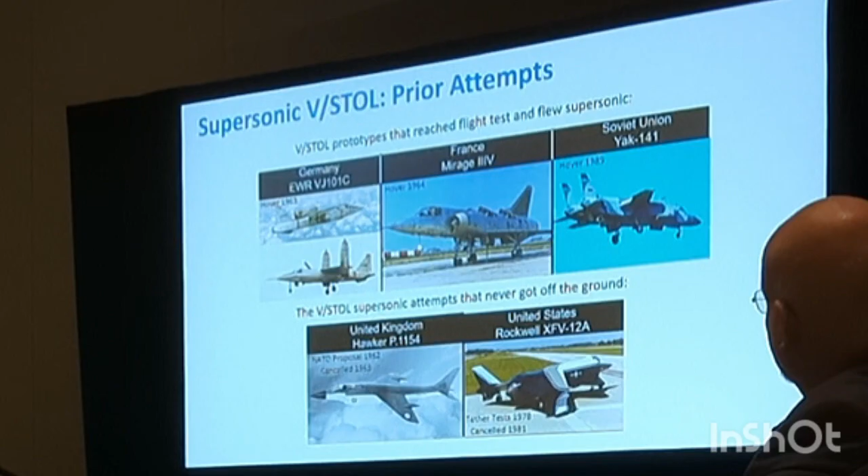Until the F-35, even the Harrier, I guess, that was not possible. Now, the Russians made a great attempt with the Yak-141, but it was not enough. They only built about 2 aircraft, and it was basically canceled with the dissolution of the Soviet Union. But still, it was probably the best attempt by any country to do supersonic flight and at the same time vertical takeoff and vertical landing. So we need to give the Russians a little bit of credit for that.

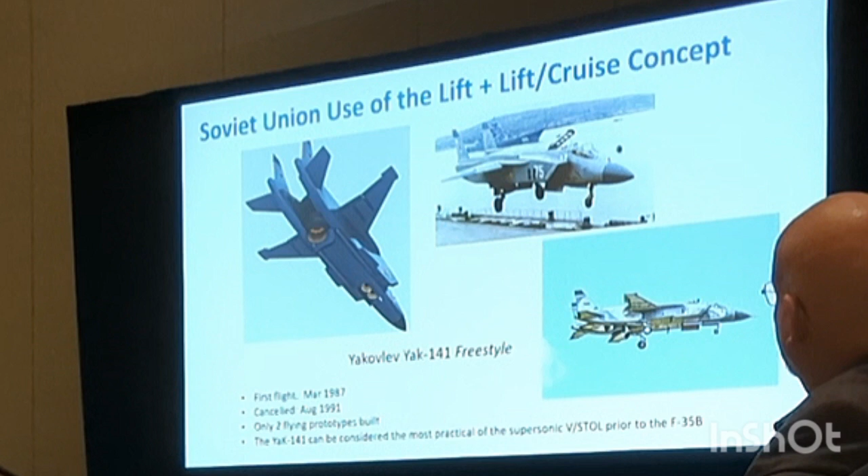Now, when Lockheed Martin—when the government came to Lockheed, they said, well, not only do I want supersonic flight and vertical flight, I want the aircraft to be common among the three services: the Air Force, the Navy, and the Marine Corps. Anyway, so here we are. So they were challenged even more to be able to do that, and that made the work of the Joint Strike Fighter even harder.

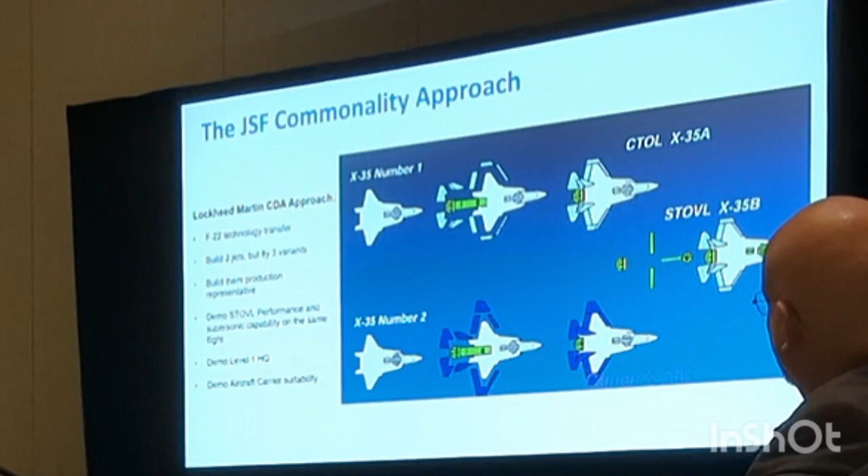I can talk for hours about the background behind all this, but in order for me to talk about the propulsion aspects of the aircraft, I need to keep going here.

Now, when it comes to turbine engines, you can either have thrust for cruise—in this case the F-22 was Super Cruise—or you can have a turboshaft in order to transmit that shaft horsepower to the front so that you can rotate the rotors. You cannot have both together; it's very hard to combine them both. In fact, until the F-35B, you never needed to combine them both.

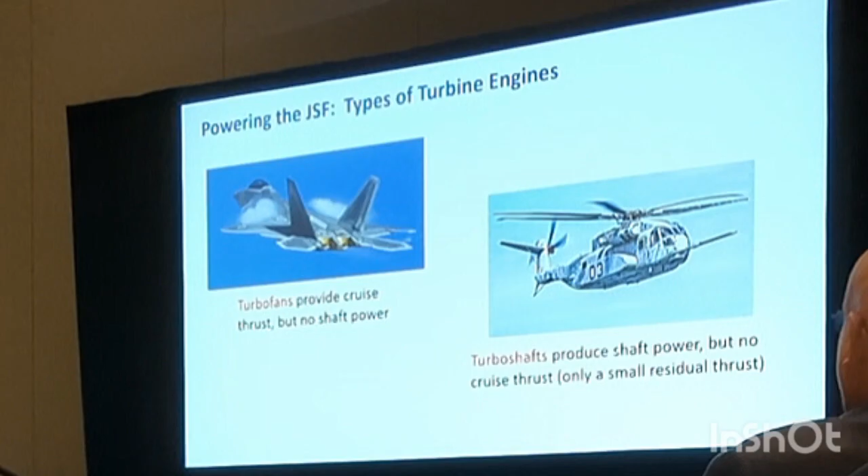There's a picture that shows the same thing I just said. In a turbojet, you get two stages of the turbine in the back, and then you get a lot of thrust out the back. In a turboshaft, you add another turbine stage, and then you move that power to the front so that you can turn the rotor of a helicopter—that's what a turboshaft is all about. So you can have either that or the other, but not both, okay?

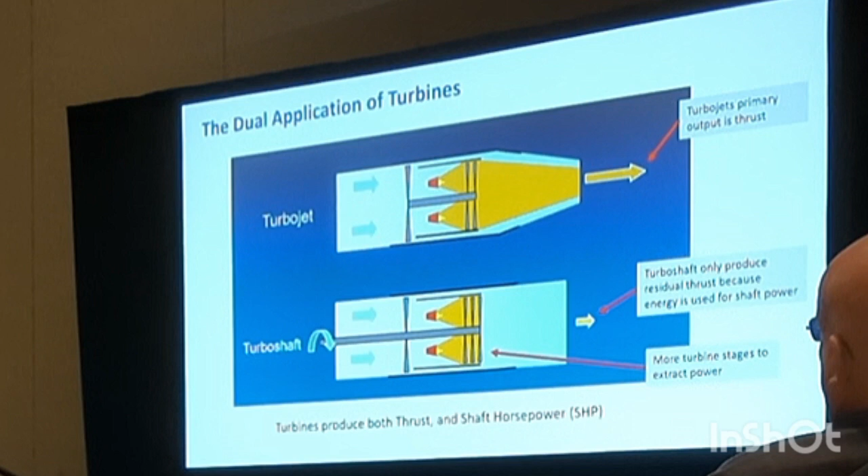Let me skip that real quick. Now, if you look at a turbojet engine and look at the energy content of the flow as it goes through the engine, the compressor will raise the pressure. Then you add fuel, and that fuel's energy burning in the combustor going out the back will basically drop as it goes through the turbine. Then it will exhaust through the nozzle, and everything else is wasted as heat, okay?

But that energy content, as it goes through the flow, you as an engineer might think, I wish I could extract some of that wasted energy. When I say wasted, it's not totally wasted, but extract some of it so that I can send it forward, so that I can put a lift fan in the front and be able to have a turboshaft and a turbojet engine at the same time.

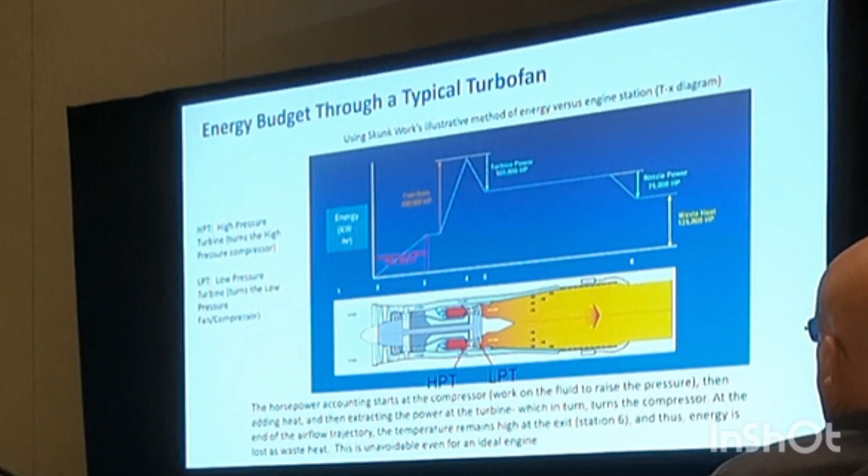That was the elegant solution that the JSF team came up with to combine both a turboshaft and a turbojet engine. Here's another picture of the same thing. I don't want to go into the math, but the bottom line is you've got energy flowing through the engine, with pressure increasing, leveling off, and decreasing as it reaches the turbine.

If you open the nozzle up a little bit, this is the elegant solution the JSF team came up with. When you open the nozzle in the back, the pressure across the turbine has to increase some. Because of that increase in pressure through the turbine, you can take some of that energy and send it forward. Of course, you lose a little thrust from the back, but you get energy extracted from the turbine that you can send to the front for the lift fan.

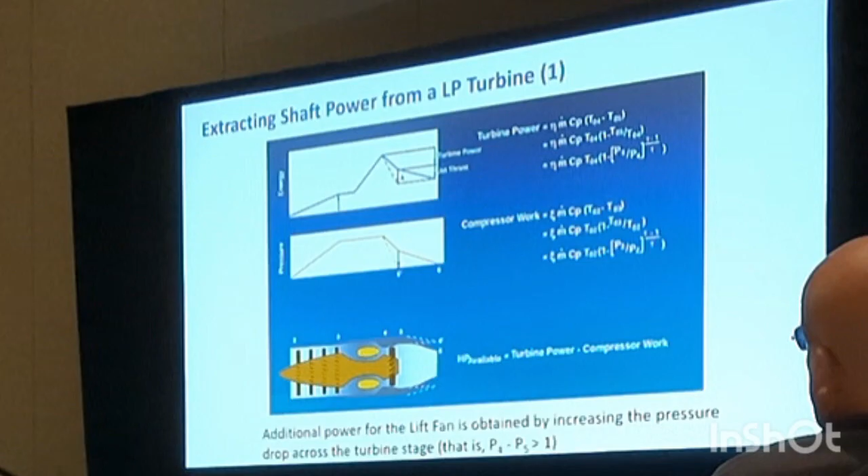Let me show you another slide. By the way, that's a picture of what I just mentioned. The thrust goes down a little bit - you see that arrow becoming a little bit smaller. The thrust becomes a little bit smaller when you open up the back.

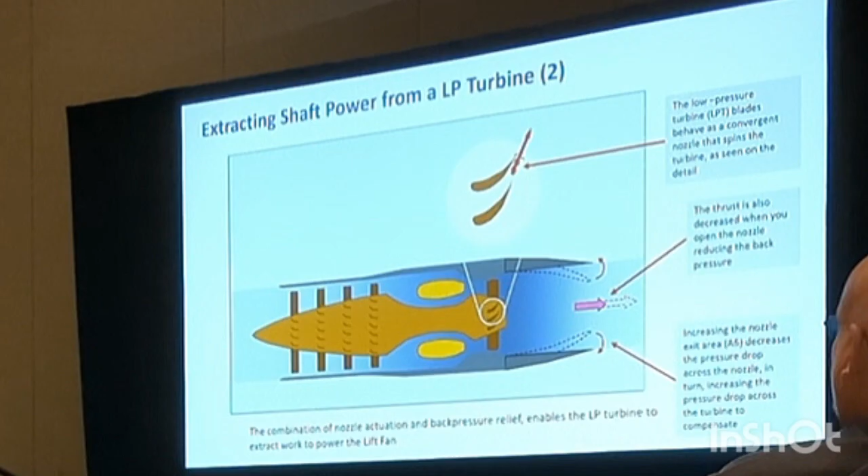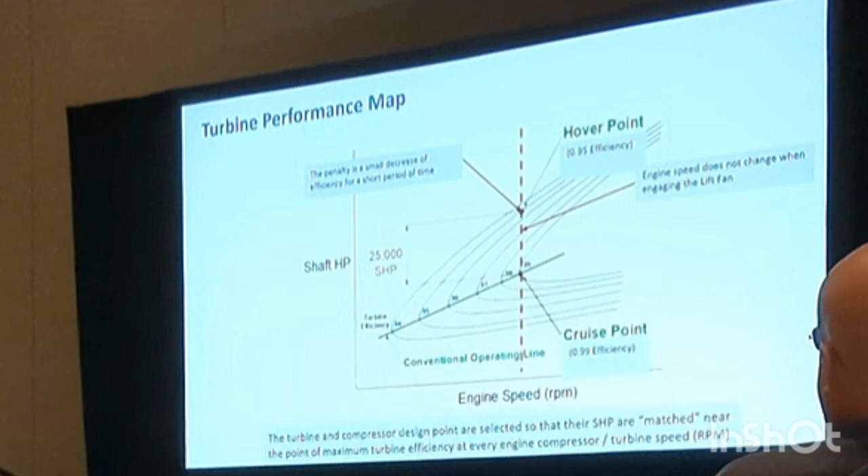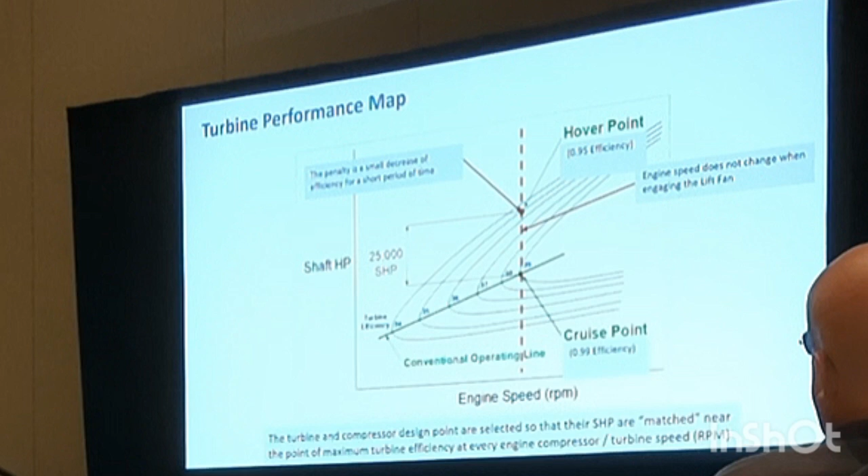That is the genius and elegance of the solution of the Joint Strike Fighter, the F-35. I know you probably have some questions about all this that I covered very quickly, but we can talk about that at the end.

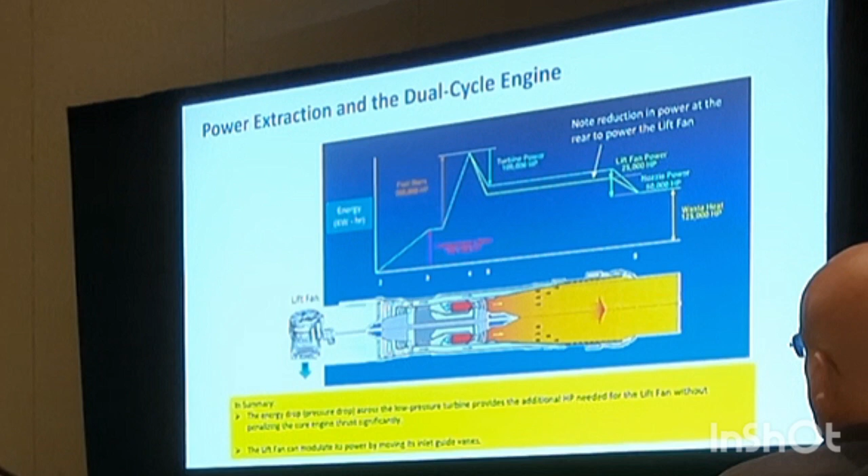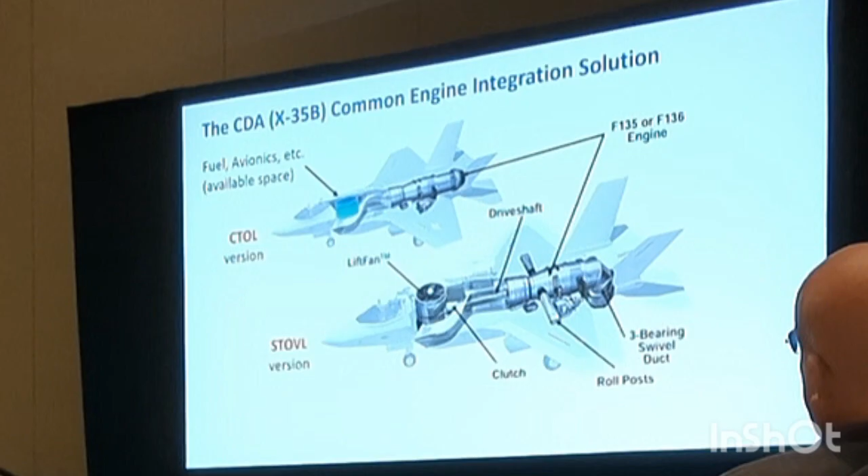Here's the common solution that Lockheed was told the military wanted - an engine that can be used for a normal, conventional aircraft, but also the same aircraft as a VTOL aircraft. Here's the same airframe with the lift fan for VTOL, and here's the conventional aircraft where when you take the lift fan out of the way, you can put fuel in there instead, or avionics or whatever. This allows the same aircraft to perform two completely different missions - that's why it's called a multi-role aircraft.

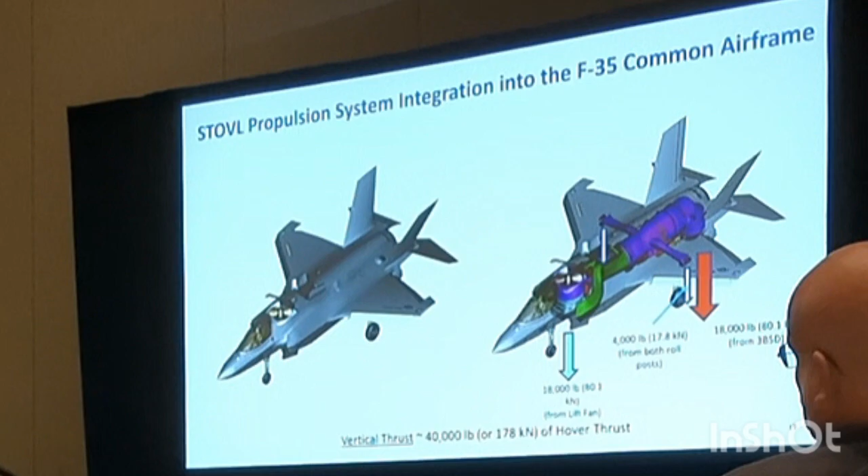Here's the same thing, and you can see the thrust coming out of the back and the thrust coming out of the front, with a little bit of thrust on the side to keep the aircraft balanced. That's the solution Lockheed Martin came up with, and that's why they won over Boeing on that contract. It was a very elegant and quick solution.

When you see that in red in the label, those are the common aspects of the engine between the two aircraft, the conventional and the vertical flight aircraft. The vertical flight aircraft has a bit more complexity because you have roll posts, the lift fan, the drive shaft, and a three-bearing swivel duct that tilts down to get the back thrust you need to go up. The conventional aircraft doesn't have that, but at least you can share the core of the engine.

You can share all that, and you can share the inlets also. That's also very important. You save money by combining stuff from different aircraft.

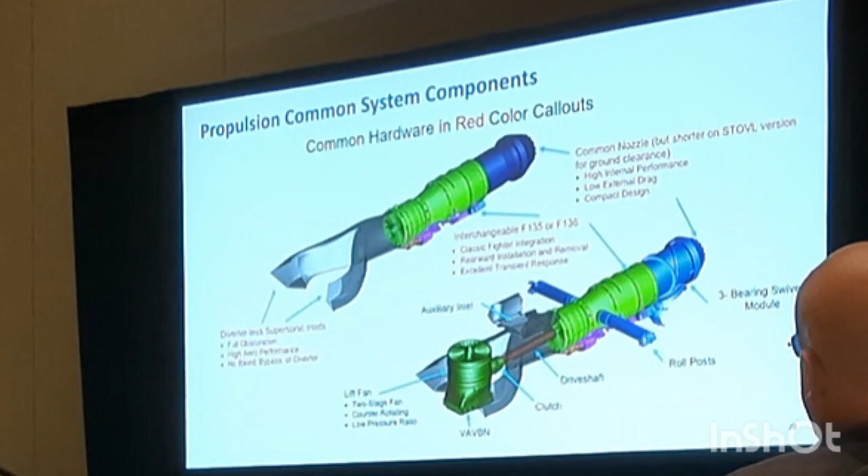And the inlets, I'm not going to go into that, that's another lecture in itself. But it's another elegant solution that Lockheed Martin came up with. My friend Tom Sylvester came up with that solution of using boundary layer plates, like an F-4 Phantom. It went from something very draggy to something very conformal. Let's call that a diverter-less inlet, and that was a very elegant solution.

In fact, the Chinese copied that. If you look at their latest aircraft, you'll see they have the same inlet. They stole it, basically, from Lockheed Martin. And I don't mind saying that because it's obvious that they did. It's perfect, a beautiful solution.

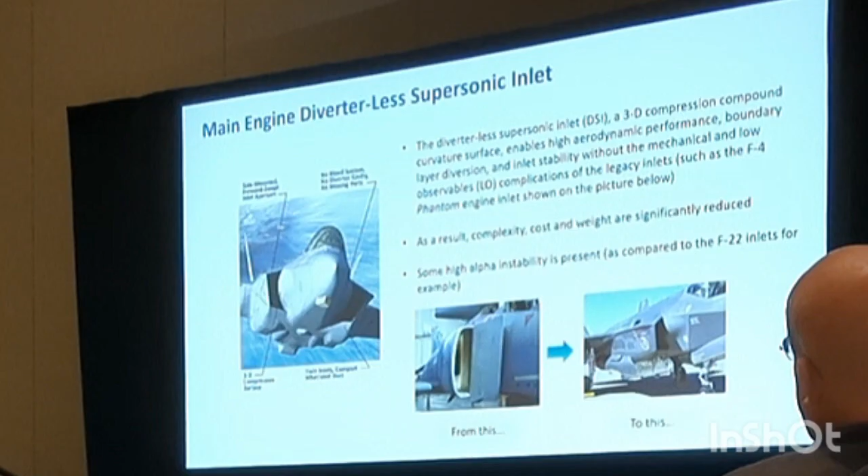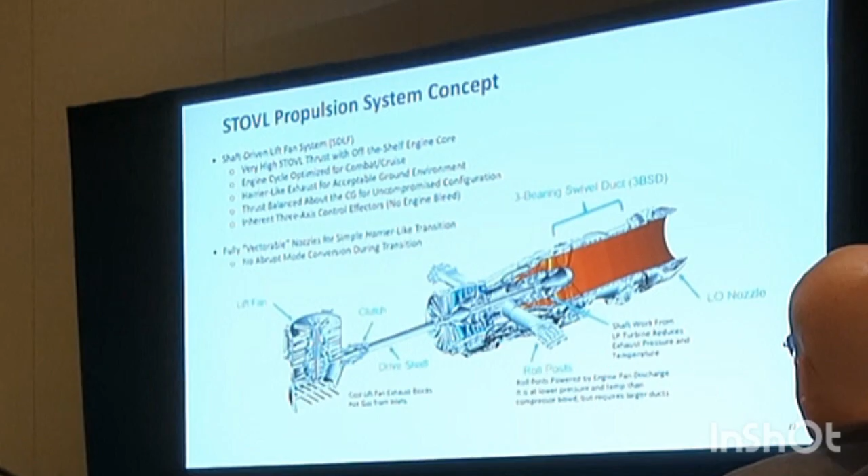And here are the different parts of the engine that the JSF, or the vertical flight aircraft, had. I don't want to go into that because I'm going to go through them one by one.

One important aspect of the Joint Strike Fighter, when you take off vertically, it's not just a simple issue of balancing the exhaust and the lift and all that. It's also the software, the engine FADEC, and the aircraft avionics combining into a propulsion system so the pilot doesn't have to think about what he's doing anymore. That's very important. Without it, the Joint Strike Fighter wouldn't have been successful either. So let's not ignore the fact that you need that.

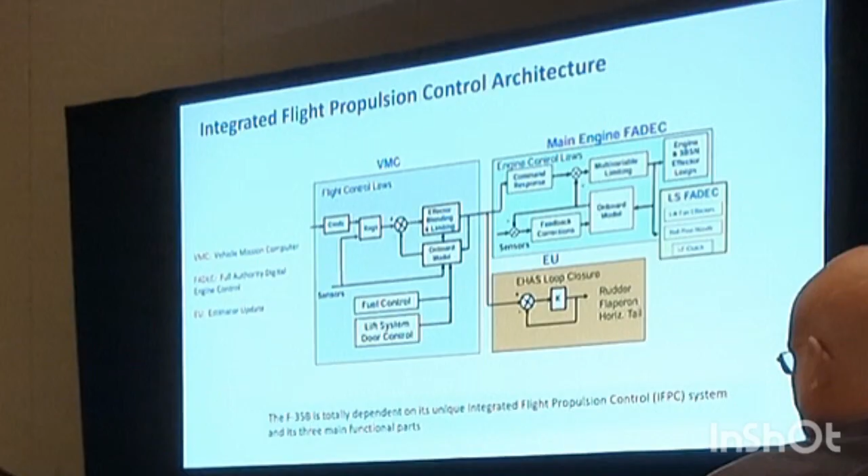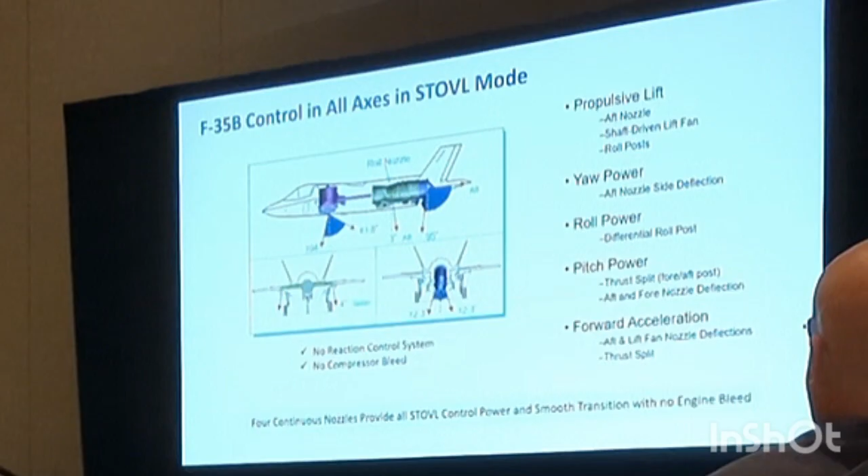Now, the three-bearing swivel nozzle, that's a very good solution. Some people think we copied that from the Russians. Maybe so, the Yak-141 had that type of nozzle. The Germans also tested it in the 1960s. But the bottom line is that Lockheed, and Rolls-Royce both, had to do a lot of thinking to be able to make it work.

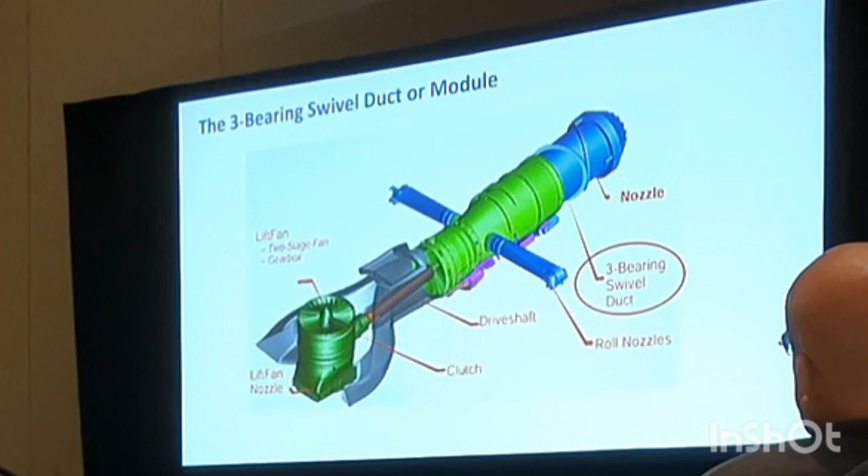Not only to make it work, but also to make it durable so it would last throughout the life of the aircraft. Here it is, it has three bearings, and these bearings are basically motors that move the three sections of the three-bearing swivel nozzle so you can rotate it down and take off vertically from the back. That's very important.

I remember being in West Palm Beach testing this three-bearing swivel nozzle. There was always a problem with the motor, a problem with leaks, a problem with the liners, you name it. I was always tinkering with it until we finally got it right. But we got it right, and it's working fantastically in the fleet right now, and it's one of the important enablers of this aircraft.

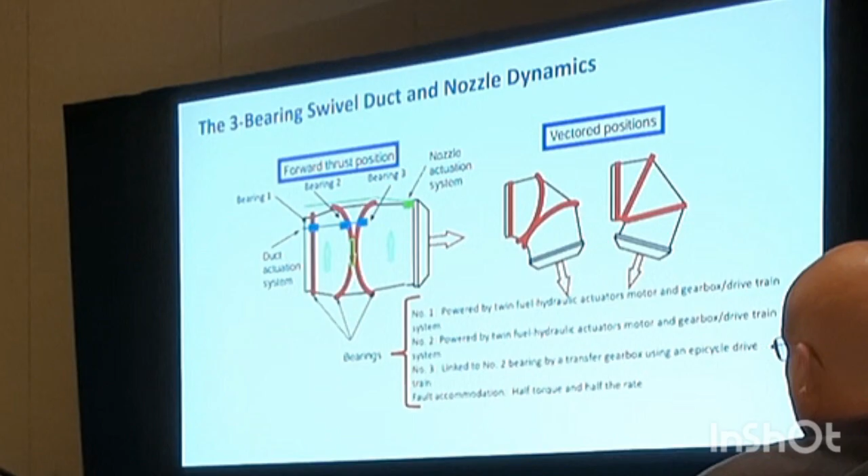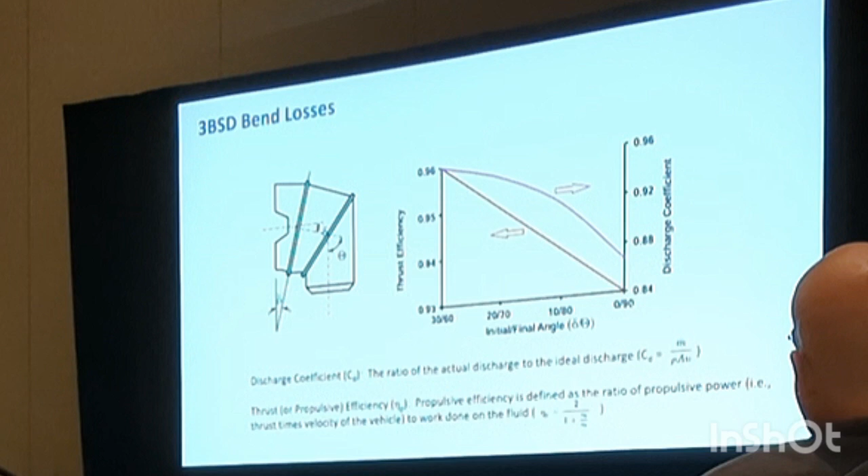This is just telling you that when you tilt the nozzle down, there are some bend losses that you have to worry about, but I don't have time to go into the theory of that.

Another thing the F-35B has to do is make sure the nozzle in the back is a little shorter than the conventional aircraft. So the nozzle, even though it's common on the vertical flight aircraft, is a bit smaller because when doing a short takeoff you don't want that nozzle scraping the runway. It's tilted down during a short takeoff, so you want to make sure it's shorter so the nozzle doesn't scrape the ground when taking off. That's another thing you have to think about when designing this aircraft.

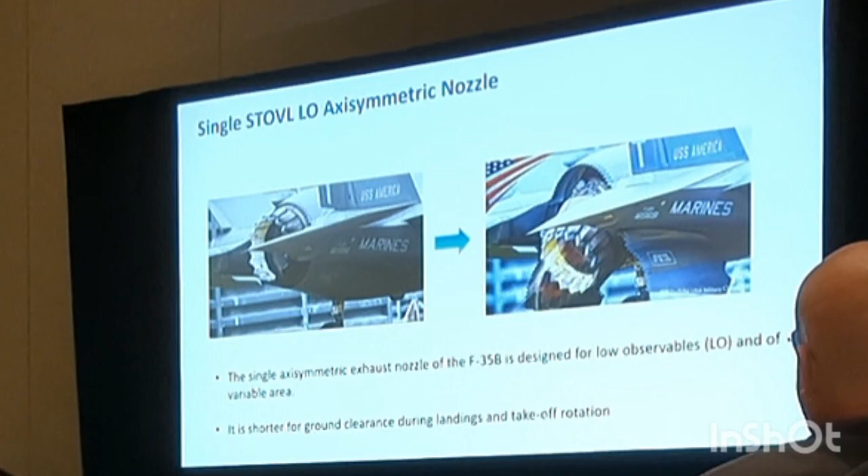The lift fan. Let's talk about the lift fan. Oh, by the way, again, thrust split. Thrust split is one of those buzzwords that the people that work on the F-35 use all the time. It's basically the distribution of lift between the back and the front, and that's what controls the aircraft in pitching attitude. That's a very important aspect of the design that the software has to deal with so that the pilot doesn't have to think about it, okay?

It's a very user-friendly aircraft, not like the Harrier. In the Harrier program, they have to select the best pilots to be able to fly the aircraft. In the F-35B, anybody can fly. I remember flying the simulator at Lockheed Martin on the F-35, and I've never flown the F-35 Bravo in my life, and I was able to land it on the ship without any problem.

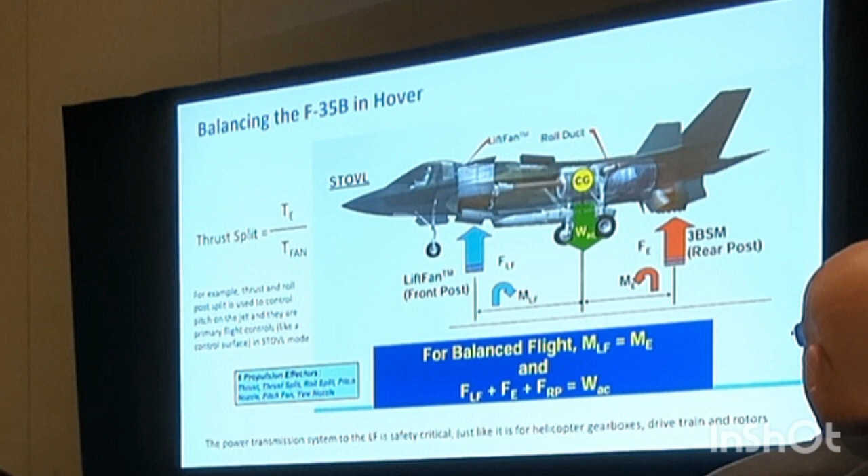On the simulator, obviously, but it showed me that you can learn and be a good pilot on the aircraft. Lift fan, two-stage rotating fan. The clutch is engaged so that you can get the fan to rotate and get that lift. You get about 20,000 pounds of thrust. It's almost like a single engine on a Boeing 737. If you flew in from, let's say, Philadelphia on a Boeing 737, one of those engines flying you here is the same thrust as the lift fan. So you can imagine how much thrust that thing has.

I remember in West Palm Beach, I used to get underneath the aircraft, the engine, when we were testing it there. We had it 20 feet high off the ground, and I used to get down below the lift fan when the engine was at ground idle. I was basically going like this, I couldn't stay standing normally because the force coming down from that lift fan was incredible. So I got that experience. It was very, very exciting to do that.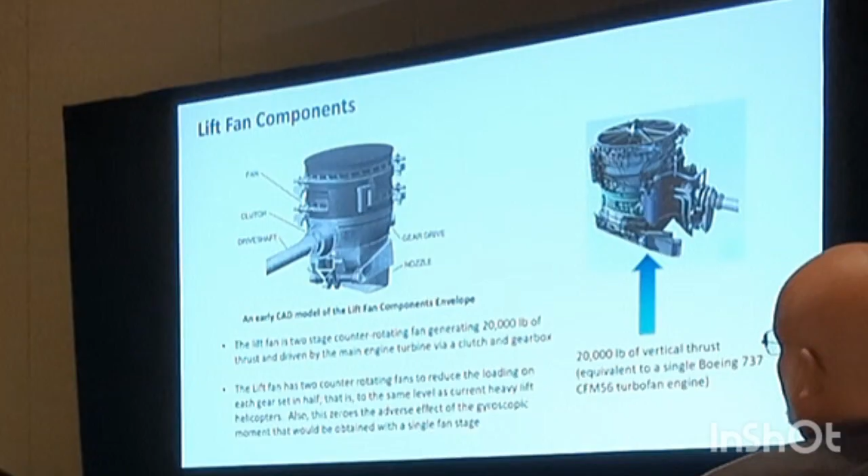There's a cross section of the lift fan. Again, I don't have time to go into it, too much stuff here. We spent a lot of time trying to figure out the auxiliary inlet for the engine, because at low speed you need to have more air coming into the engine. And also how to design the doors that open up so that you can get air into the lift fan.

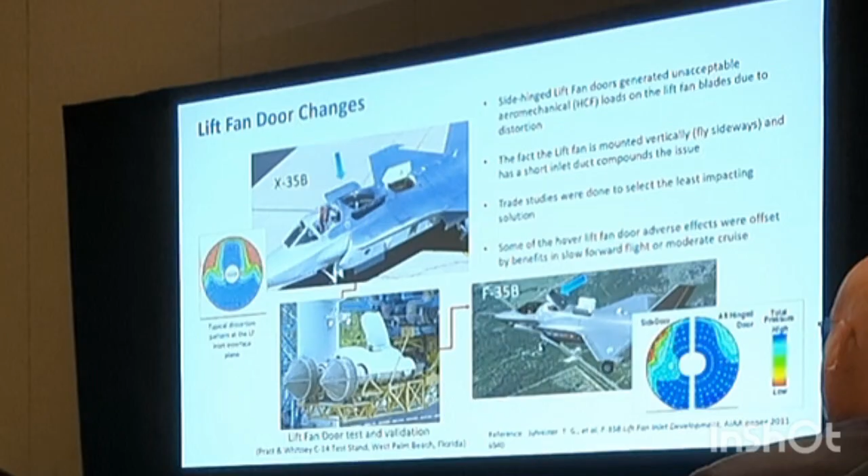We ended up testing here at West Palm Beach. Here's the test. I was here for that testing, by the way. We had to figure out how to make sure that the aerodynamics coming into the lift fan were benign to the blades in the fan. Because if you don't have good, smooth air coming into the inlet, you can excite certain frequencies, they call them passive frequencies, on the fan that could eventually fatigue the blades and break them.

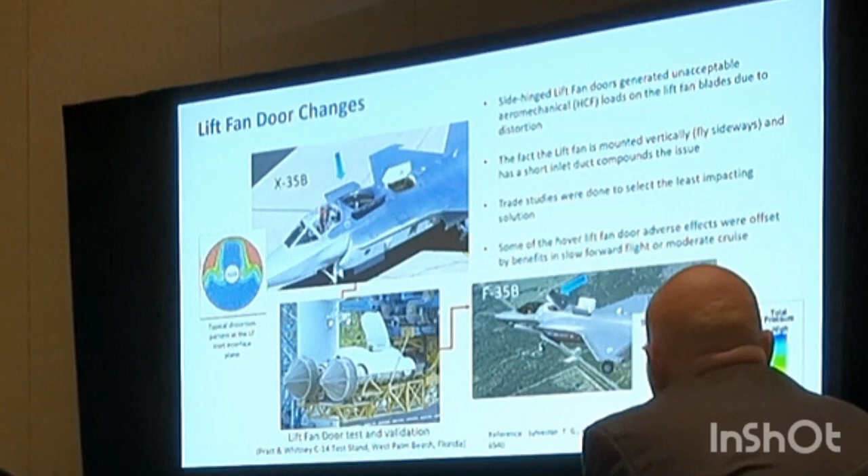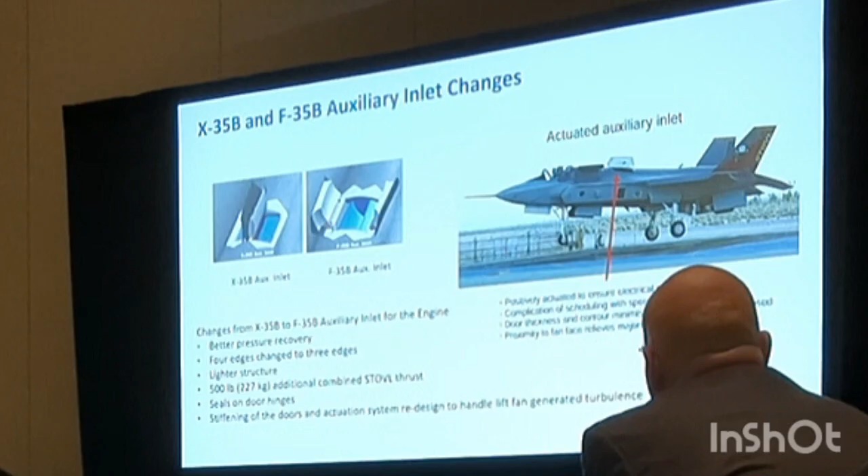So you have to make sure that the airflow coming inside the inlet is as good as possible. You're always going to have a little bit of loss. That's what the red thing in here is for, but it's better than this, obviously. So we went from that door to this door in order to avoid all that red, which you see here minimized. See that? And there's the picture of the before and after. There's more to it than just getting good lift and inlet recovery numbers, but I don't have time to go into it.

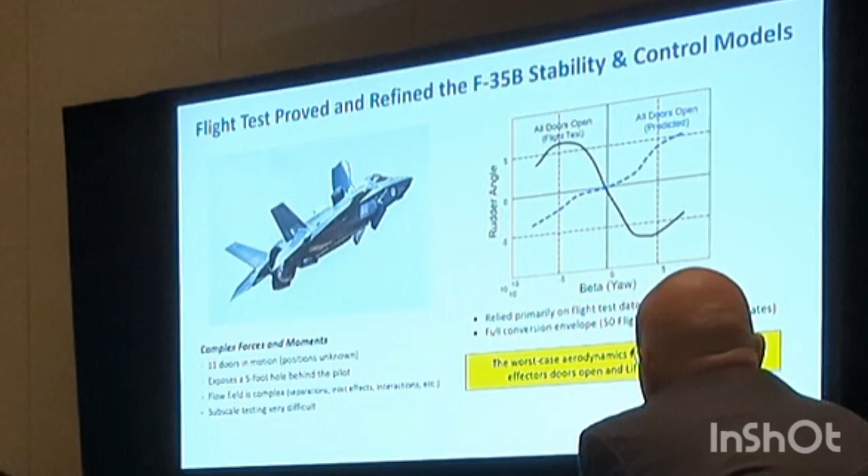Same with this. When you're flying the aircraft with the door open, there are certain yaw controllability issues that you have to worry about. This is the important flight test. This is the predicted, simulated software stuff that we thought the door was going to do to the yaw moments of the aircraft. But when we tested the aircraft at Pax River, we found out that it created this curve instead of that curve. Look at how different they are. So that's the importance of flight testing, right? You never know what's going to happen until you actually test the aircraft. This is the predicted, this is the actual, okay?

Lift fan nozzle: beneath the lift fan, you have a variable vane box nozzle that is used to direct the vector of the lift fan so that you can go forward or move the aircraft back. That's another great design aspect of the aircraft.

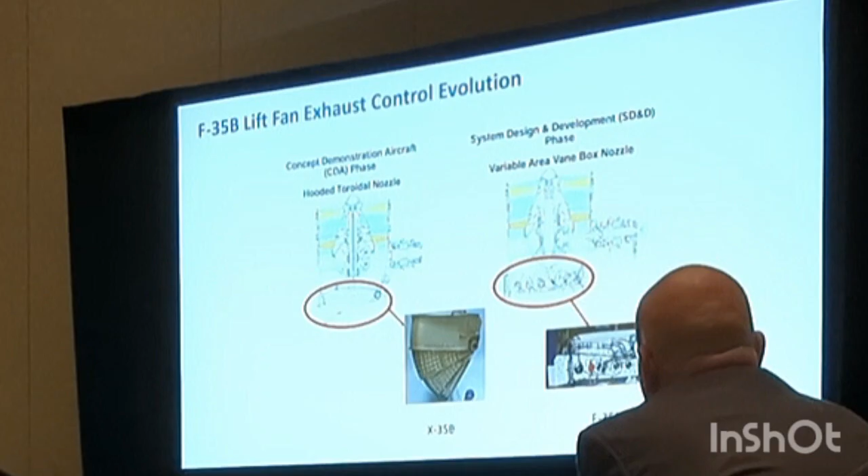I could spend another half hour on this alone, there's more to it, but I don't have time to go into it. This is a great design, guys. There are so many little details that put this aircraft together. If I had an hour and a half or two hours, you guys would come out of here as experts in STOVL, but unfortunately we don't have time.

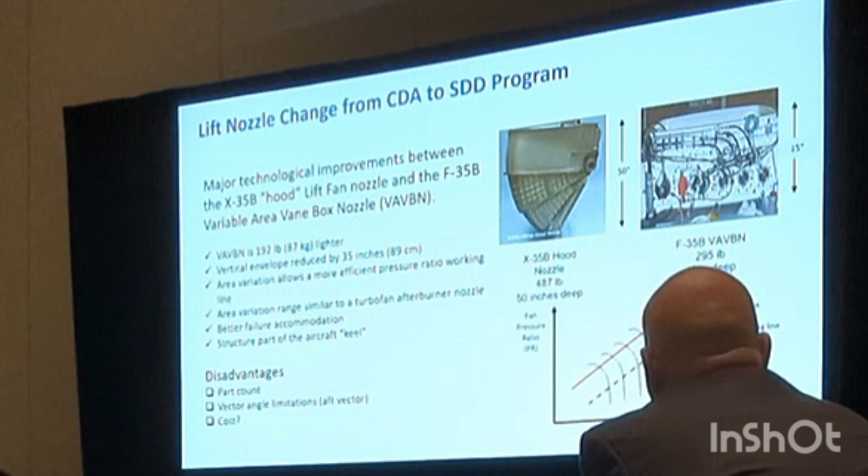Initially on the X-35, we had a hood type of lift fan variable nozzle on the bottom, but we changed it to a box nozzle so we could get a better stall line. You see the stall line right there? This is the hood stall line, and this is the variable vane box nozzle stall line, which improved. You want to get it as close to the stall point as possible to make it better, because you want an efficient box nozzle.

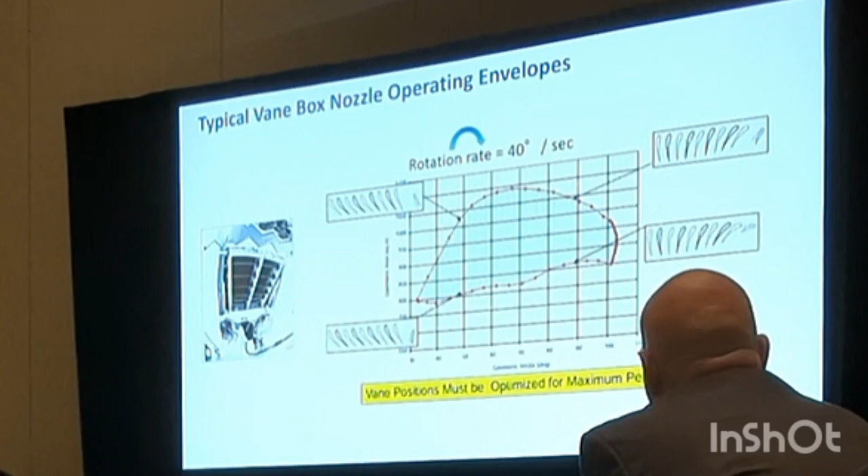The box nozzle also has vanes that move according to this envelope. This is the area you have to worry about. Depending on the regime of flight, this dot will move around the curve, depending on how those vanes are moved, and they rotate about 40 degrees per second. That's pretty quick, we move those things very fast. The computer does all that, the pilot doesn't have to worry about it.

For example, on takeoff, the pilot just puts the throttle forward, and the vanes rotate the vector of the flow coming out of the lift fan to different angles until the aircraft is flying away. Then it goes to a vector of 50, and the door comes down a little bit, and the pilot isn't even worried about any of that. It's just taking off—those are things the computer is doing internally when the aircraft takes off from an aircraft carrier.

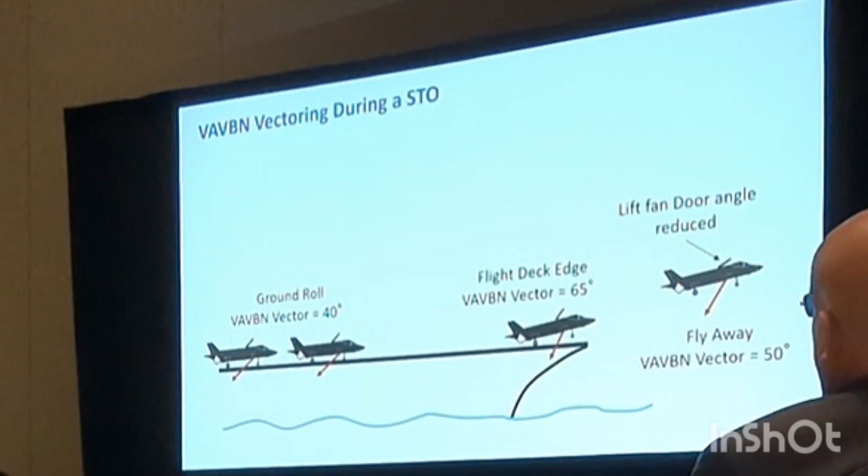The drive shaft and the clutch are very important, because you're transmitting all that power from the turbine to the front through a shaft and through a clutch, which is right there, and you have to engage the clutch.

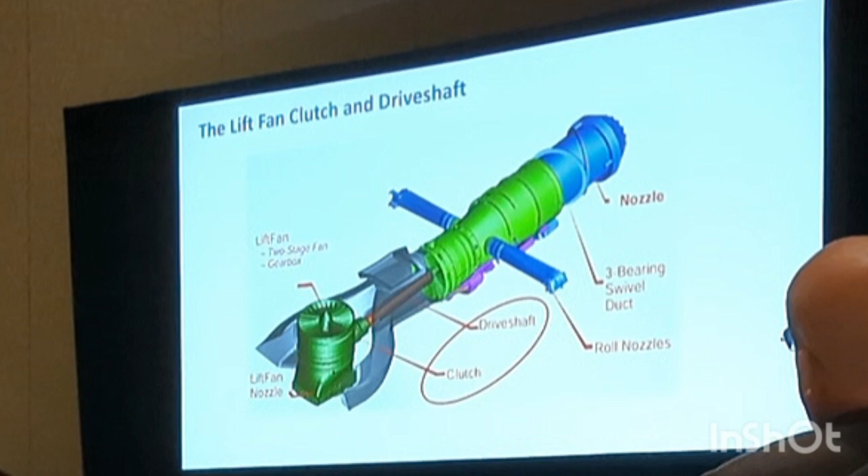What the pilot does is push a button on the cockpit that says STOVL, and the doors begin to open, the clutch begins to engage, the lift fan begins to rotate, the variable area vane box nozzle begins to start moving, the three-bearing swivel duct begins to come down, the airflow goes through the roll post to keep the aircraft level, and he's just sitting there happy without having to worry about it. That's the beauty of the aircraft.

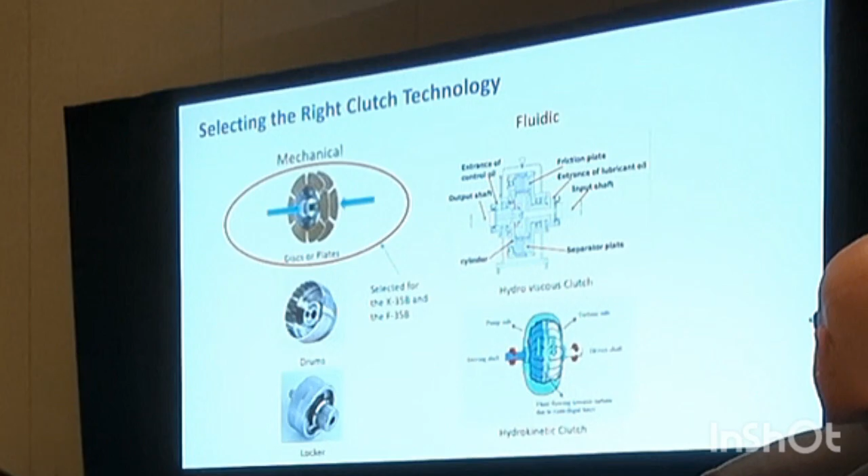Let me skip some of this stuff—I'm going to have to skip all this, unfortunately. Let me finish with this last part right here.

The Harrier was a fantastic aircraft, and the F-35 is also a great aircraft. We really wanted to improve the Harrier, not just live with something like it, and that's the challenge Lockheed Martin was given. This slide shows on the left some of the things you had to worry about that weren't as great on the Harrier, and on the right you can see the F-35 was able to fix a lot of those.

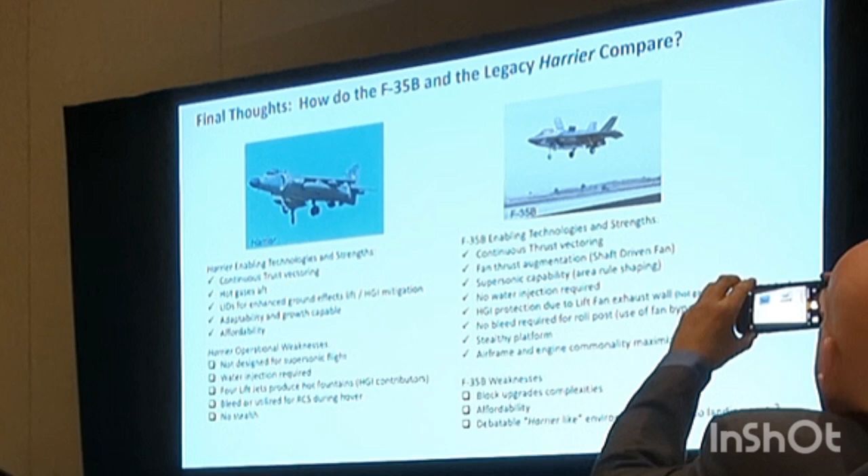Go ahead and take a picture of this slide and read it on your own, so you can get a sense of where we came from and where we are today. I don't know if in the future we're going to have a replacement for the F-35B—that's for the young people in the audience to be challenged with in the future. I don't know if China is going to come out with an F-35 look-alike, maybe they're working on it right now, we don't even know it.

The bottom line is that the solutions that Lockheed Martin and the military partners—Rolls-Royce, Pratt & Whitney, and some of the other guys, who by the way earned a trophy for this propulsion system, which was great, and I was very happy about that, I remember the day it was announced—came up with. The fact that we were able to do all that and improve the Harrier at the same time is one of the greatest aeronautical engineering accomplishments of the last century. I think we, the United States industry, deserve great credit, including members of the SAE.

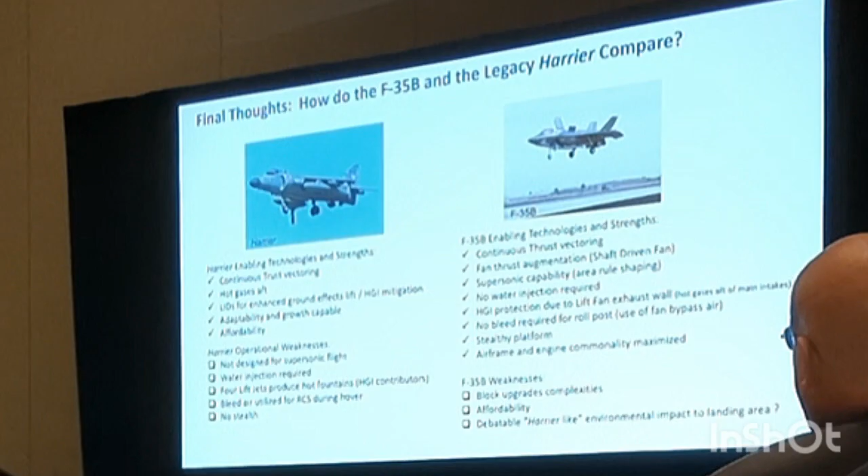With their guidance and different committees that made that happen, we should be very proud of that. And I'm done with that. Thank you very much.